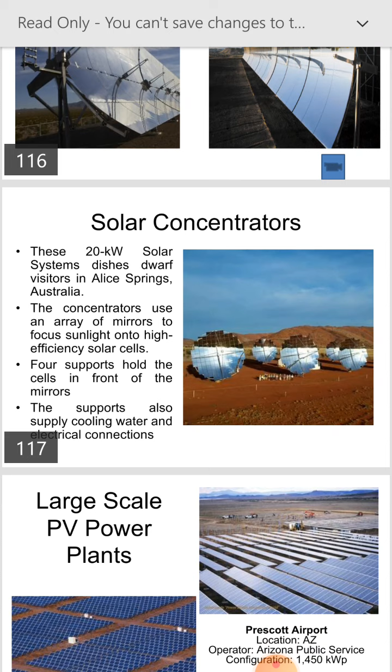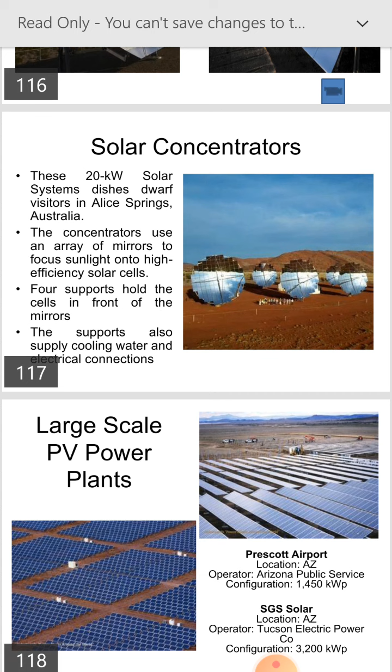Here is a 20 kilowatt solar dish concentrator system at Alice Springs, Australia. The concentrator uses an array of mirrors to focus sunlight onto a high efficiency solar cell. A support structure holds the cell in front of the mirror, and also supplies cooling water and electrical connections.

We can show a large scale PV power plant in the figure.

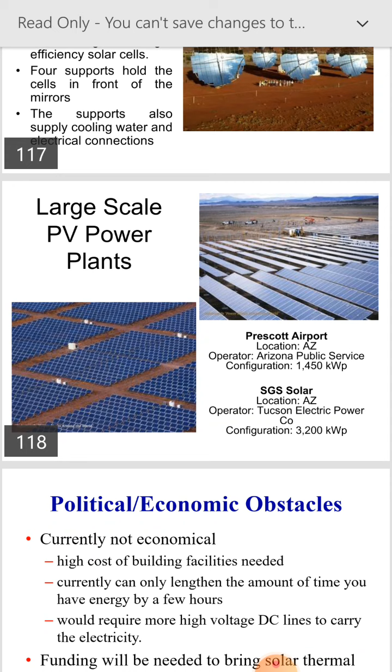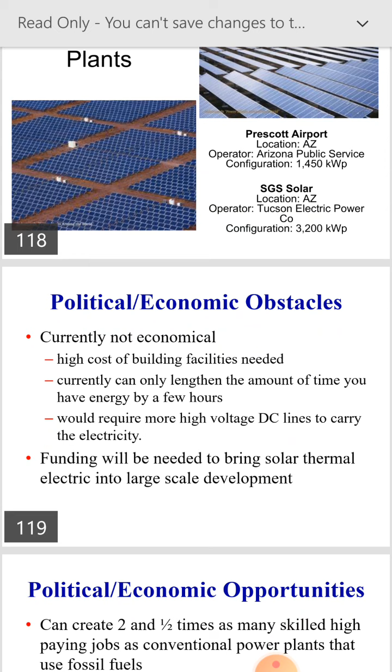Political economic obstacles: currently not economical, high cost of building the facility needed. Currently it can only lengthen the amount of time you have energy by a few hours, and would require more high voltage DC lines to carry the electricity. Funding will be needed to bring solar thermal electricity into large scale development.

Political economic opportunities: can create 2.5 times as many skilled high paying jobs as conventional power plants that use fossil fuel. Moderate net energy, moderate environmental impact, reduced with natural gas turbine backup.

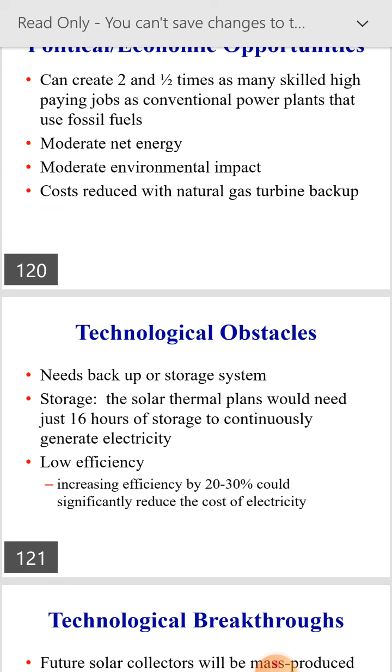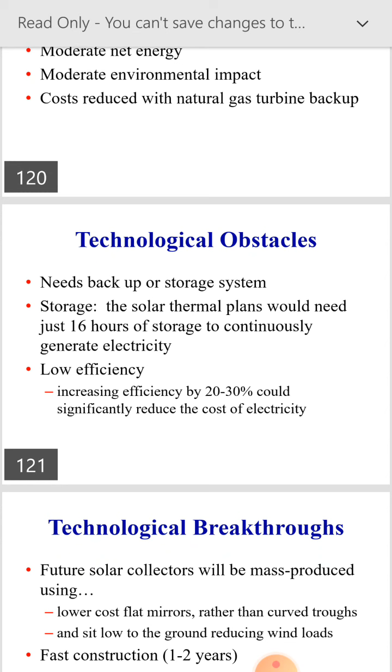Technological obstacles: need backup or storage system. The solar thermal plants would need just 16 hours of storage to continuously generate electricity. Low efficiency - increasing efficiency by 20 to 30% could significantly reduce the cost of electricity. Technological breakthrough.

Future solar collectors will be mass produced using low cost flat mirrors rather than curved ones, and sit low to the ground, reducing wind load. Fast construction.

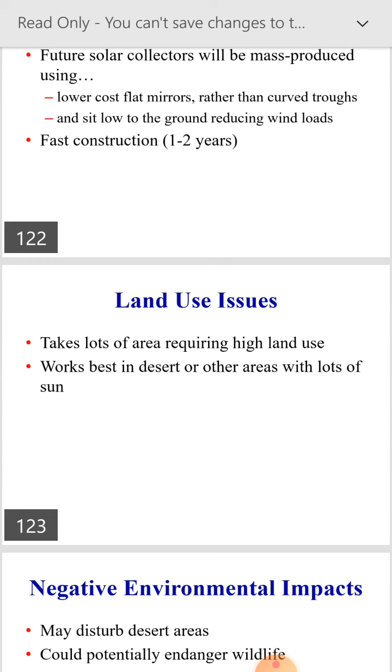Land use issue: takes lots of area, requires high land use. Works best in desert and other areas with lots of sun.

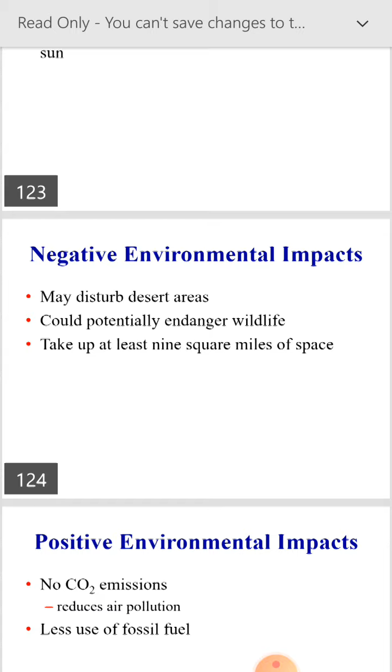Negative environmental impact: may disturb desert areas, could potentially endanger wildlife, takes up at least 9 square miles of space. Positive environmental impact: no CO2 emissions, reduces air pollution, less use of fossil fuel.

Advantages of solar energy: clean, sustainable, free, provides electricity to remote areas. Disadvantages of solar energy: less efficient and costly equipment, part time, reliability depends on location, environmental impact of PV cell production.

After that, we will discuss tidal energy. Tidal electricity generation works as the tides come in and again when it goes out. The turbines are driven by the power of the sea in both directions.

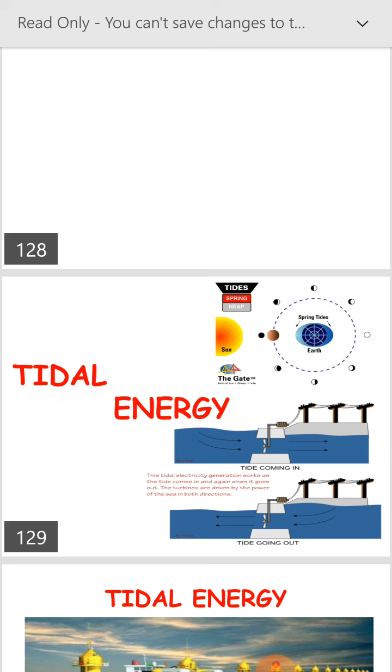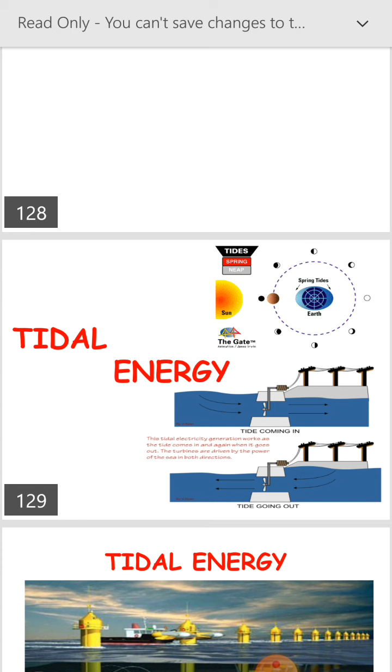We can show a figure of a tidal plant, with the tide coming in and the tide going out. Here is tidal energy, and an actual picture of tidal energy. Tides, or waves, are the periodic rise and fall in the level of the sea.

Tides occur due to the attraction of seawater by the moon. Tides contain a large amount of potential energy which is used for power generation. Tidal energy is a form of water power that occurs in the ocean, converting the energy of tides into electricity. Tidal energy is a renewable resource because it can be replenished, caused by the moon's gravity, which will last a long time.

Tidal energy is the result of the moon's gravitational attraction on earth, and the way the moon's gravity pulls the ocean into a bulge as the moon orbits Earth. The tide must rise the water at least 10 feet.

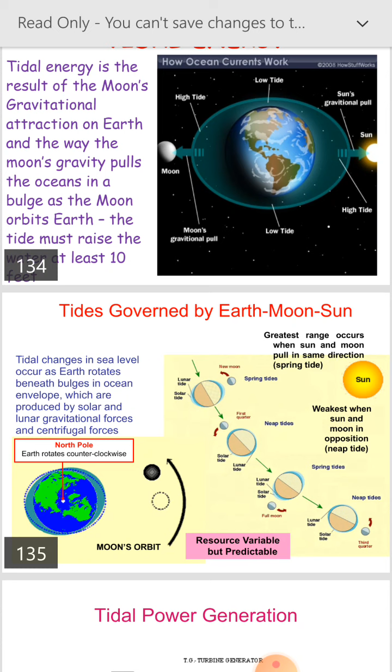Tides are governed by Earth, Moon, and Sun. Tidal changes in sea level occur as Earth rotates beneath the bulge in the ocean envelope, which is produced by solar and lunar gravitational forces and centrifugal forces. These resources are variable but predictable.

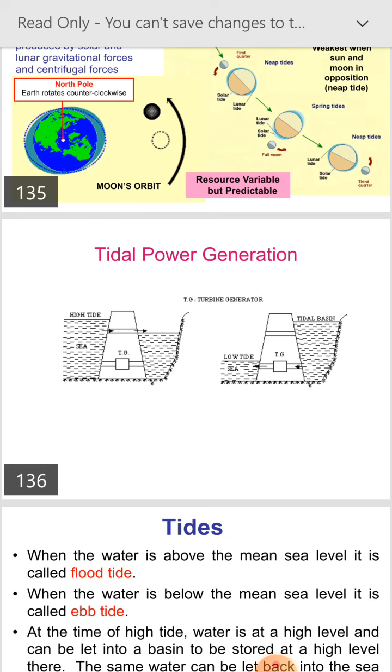Tidal power generation - the figure shows tidal power generation. When the water is above the mean sea level, it is called flood tide. When the water is below the mean sea level, it is called ebb tide.

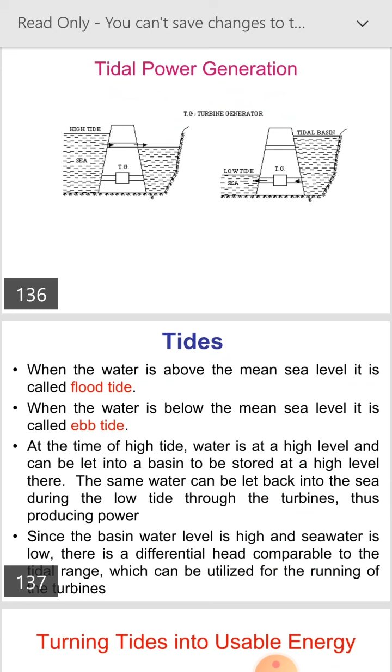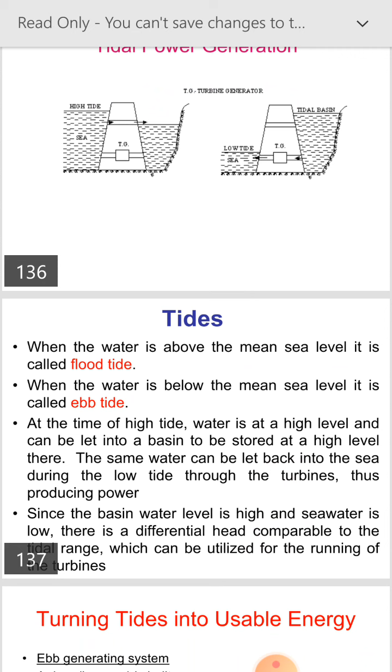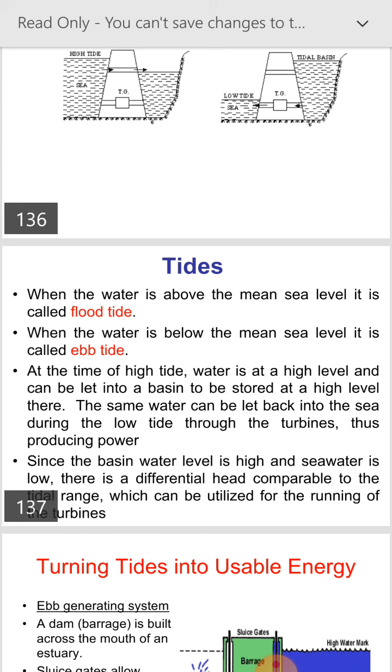At the time of high tide, water is at a high level and can be let into a basin to store at high level there. The same water can be let back into the sea during the low tide through the turbine, thus producing power. Since the basin water level is high and the sea water is low, there is a differential head comparable to the tidal range, which can be utilized for running the turbine, turning the tide into usable energy.

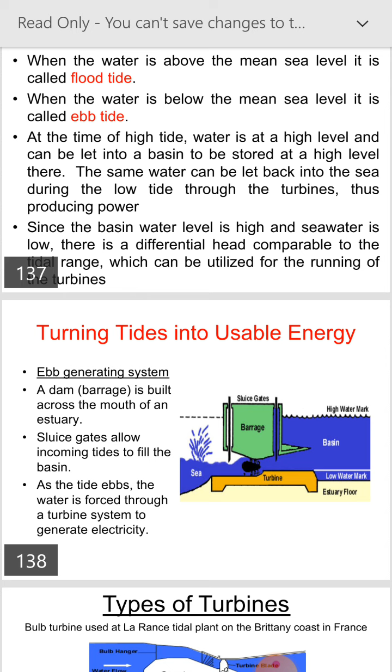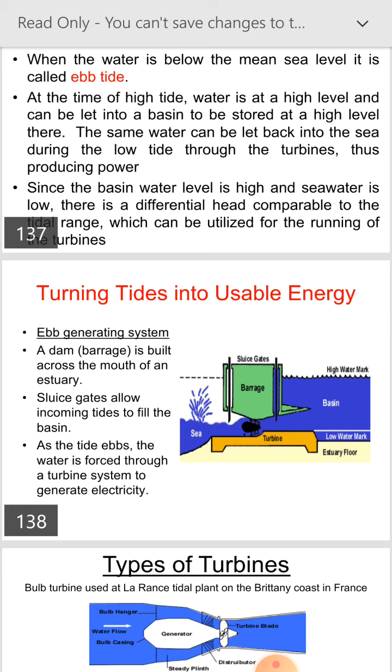In the ebb generating system, a dam is built across the mouth of an estuary. Sluice gates allow the incoming tide to fill the basin. As the tide ebbs, the water is forced through the turbine system to generate electricity.

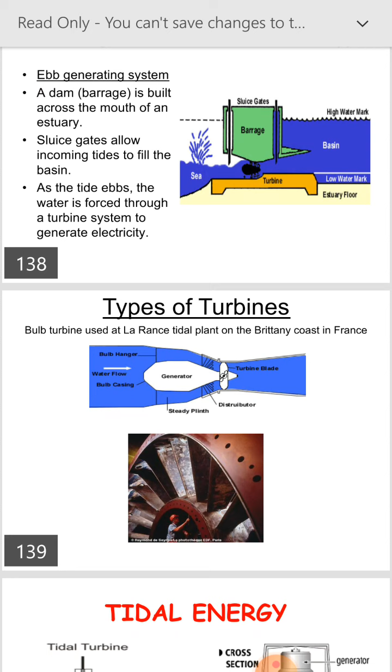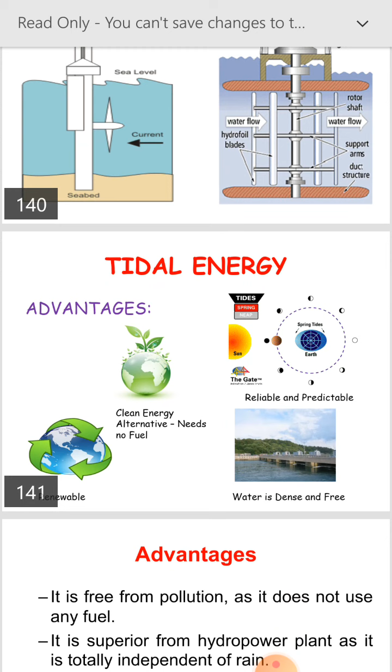Types of turbine: the bulb turbine, used as at the La Rance tidal plant on the Brittany coast in France. The figure shows tidal energy. Tidal energy advantages: clean energy alternative, needs no fuel, reliable and predictable, water is dense and free.

Advantage: it is free from pollution as it does not use any fuel. It is superior to hydropower plants as it is totally independent of rain. It improves the possibility of fish farming in the tidal basin, and it can provide recreational facilities to visitors and holiday makers.

Advantage: tidal energy is renewable and abundant - estimates suggest it could produce 60% of world energy. Pollution free, relatively consistent, unlike wind which is inconsistent and is highly concentrated in certain areas depending on topography.

Water is a free resource and presents no difficulty to migrating aquatic animals. Disadvantages: impact on shoreline, limited use, can affect fish migration, expensive parts.

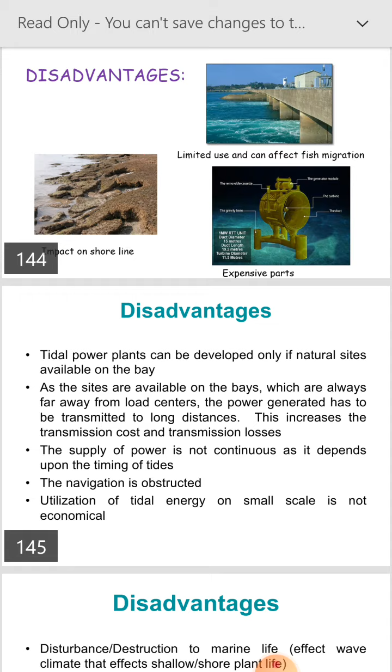Tidal power plants can be developed only if natural sites are available on the bay. As the sites are available on the bay, which are always far away from load centers, the power generated has to be transmitted over long distances. This increases the transmission cost and transmission losses.

The supply of power is not continuous as it depends upon the timing of the tides. Navigation is obstructed. Utilization of tidal energy on a small scale is not economical.

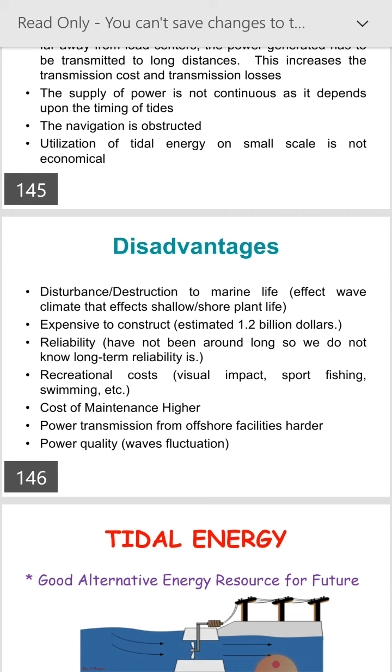Disadvantages: disturbance and destruction to marine life, affects wave climate which affects shallow shore plant life, expensive to construct, reliability - tidal plants have not been around long, so we do not know long term reliability.

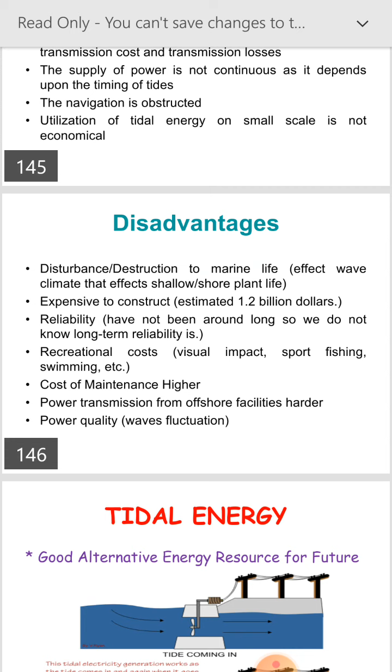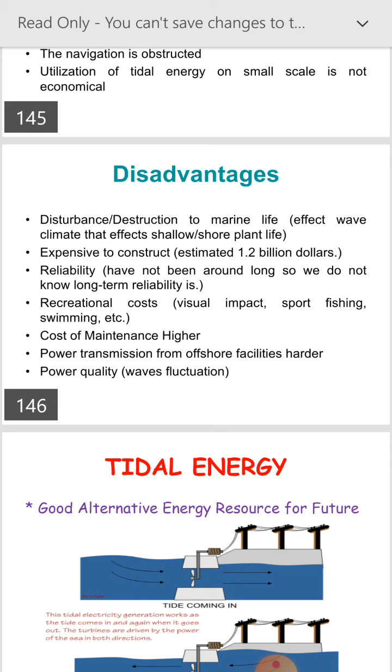Recreational cost, visual impact, sport fishing and swimming, cost of maintenance higher, power transmission from offshore facilities harder, power quality affected due to wave fluctuation. Tidal energy is a good alternative energy resource for the future.

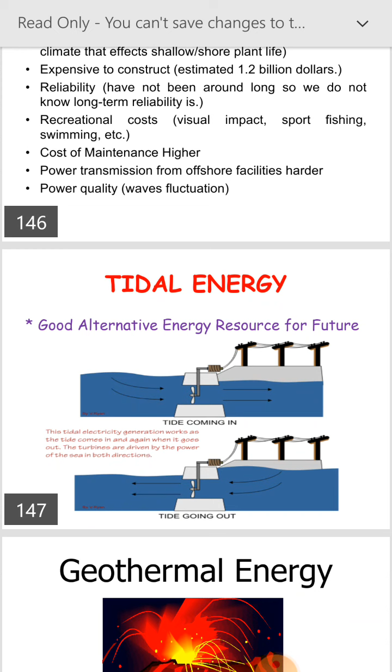This tidal electricity generation works as the tide comes in and again when it goes out, the turbines are driven by the power of the sea in both directions - tide coming in and tide going out.